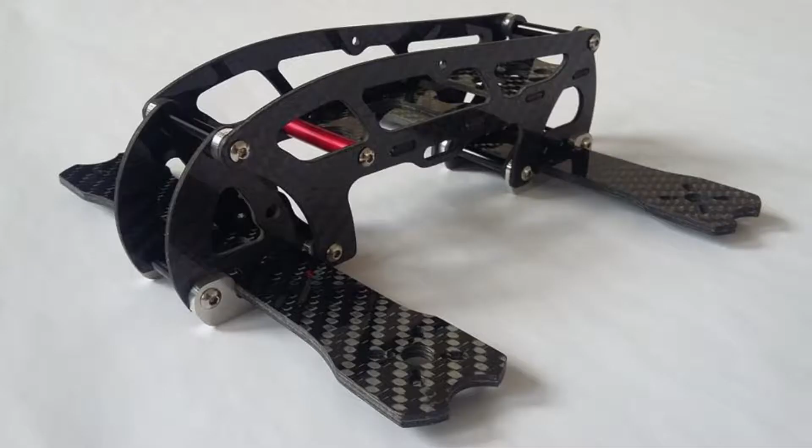Alright, let's kick off quickly with things that we didn't like, things that were frustrating. I went through a bunch of emails, WhatsApps, and guys phoned me, and all the comments and stuff, went through those as well. Before we go through this, a big thank you - there was a bunch of feedback, and you can see a good number of pilots spent a lot of time and effort to make the feedback as good as possible. There was very specific feedback, which is extremely helpful for us to make the best possible frame we can. So guys, a big thank you for all that feedback.

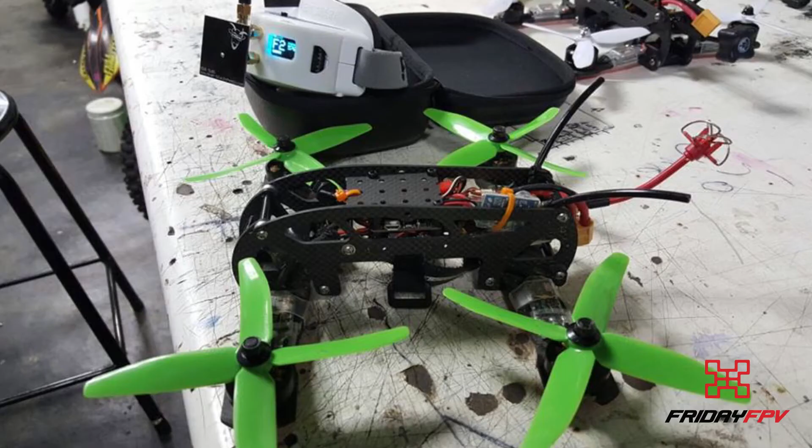Alright, so what didn't we like? I asked the question, what on the frame kit broke? And without a doubt, it was side plates and arms. That we're going to have to address - we're going to have to make these frames tough enough to carry the more powerful powertrains that a lot of us are now flying. So that's going to have to improve.

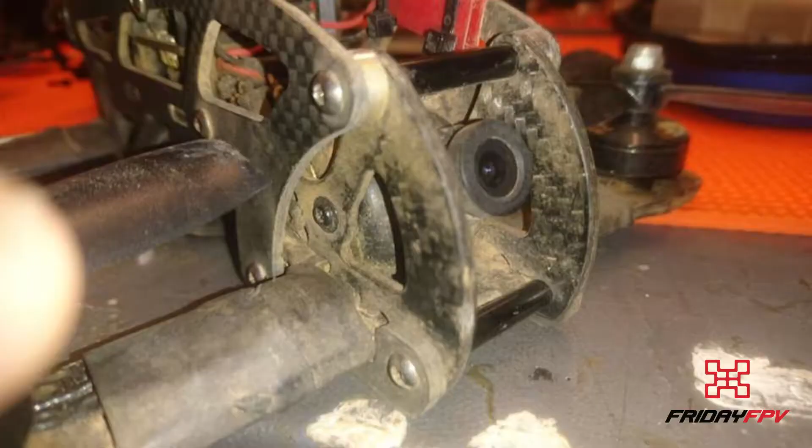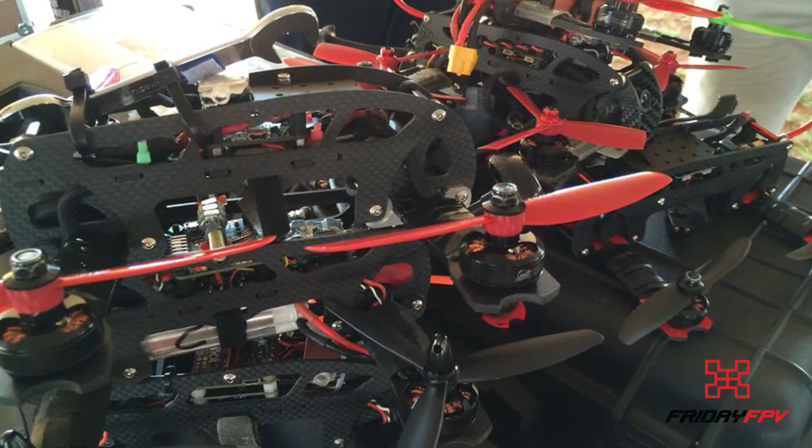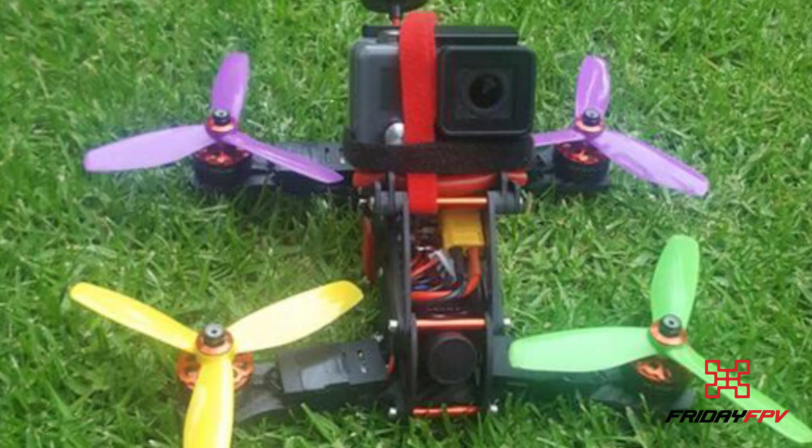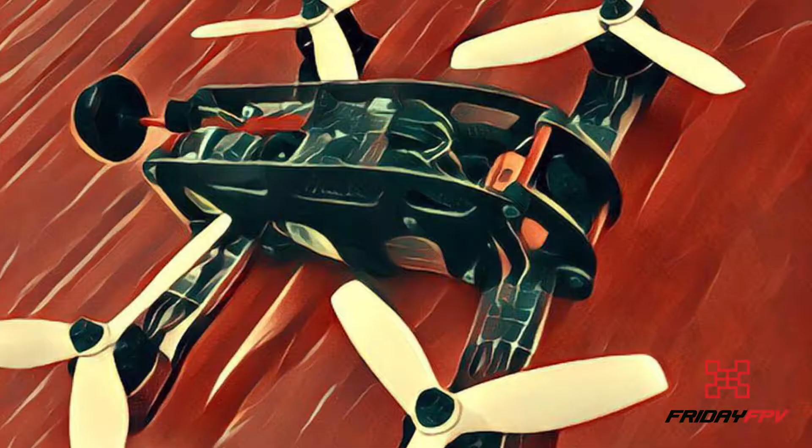Something else that came up a bunch - there wasn't a cut and dry yes or no to this, there was probably a good split. So if you do have any comments on batteries, please let us know. Some guys commented and said they would like the option to fit bigger batteries into their airframes. The frame was designed for a 1300 milliamp pack, and even today the vast majority of pilots still fly 1300 milliamp battery packs. So a good percentage of the guys we had feedback from were not concerned about the limitation on battery size at all. So like I said, if you have some comments on that, let us know.

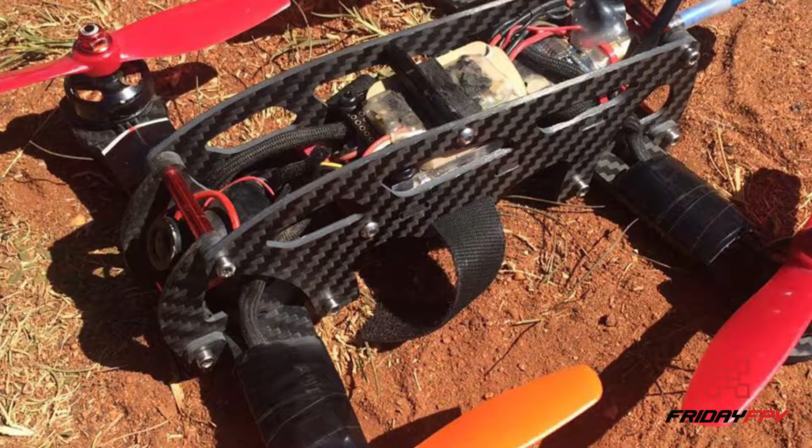The XT60 - guys liked the fact that you could protect your XT60 and protect your balance lead because it was housed internally. You wouldn't damage it in a crash, and you ran no risk of a prop strike. What guys didn't like was the fact that it was so fiddly and frustrating to connect and disconnect. So we're going to try to keep the protection aspect of it, but just make it simpler to plug into your pack.

Cameras was something that came up a bunch. I think this was one of the number one things that guys commented on. The camera angle was limited. I completely agree with that - we've got to increase that camera angle.

Also, the camera adjuster was buried in the frame, hidden by the side plate, so you couldn't easily adjust your camera angle. Guys want the option to be able to adjust the camera on the fly in the field, adjust it to where they want it, and lock it down in place. Also, the fact that the frame was only designed for one specific camera, the HS1177 - guys asked for the option to fit other brands and other format cameras for their frames. So we'll address that as well.

I think from my side, one thing that I felt was not so great was the complexity of the build and complexity of maintenance for the frame. It's definitely not the simplest frame, and especially for someone new to the hobby, it can be a complex build. So I want to make this frame as simple as possible. I think the fact that it did such a good job of protecting your electronics and your battery in particular made it a very attractive option to a lot of newcomers to the sport. Guys are concerned about wrecking equipment, and they may be nervous about flying, so the option of having a frame which protects your equipment is extremely appealing, but it was a complex build. So that is one of the things that is number one on my list to improve - make the frame as simple as possible so it's easy to build and easy to maintain.

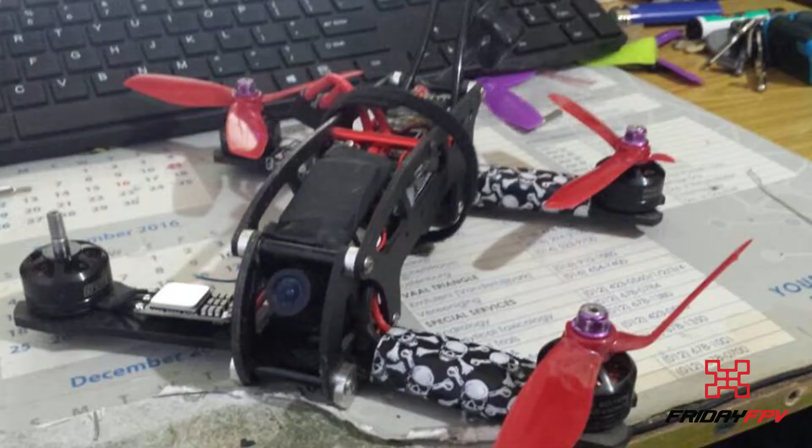Car analogies were actually used a couple of times, not just once. Justin made a nice analogy to the VW Golf. He said the current Golf 7, Golf 6, Golf 5, you can see it's a family. You can see from generation to generation what they've done, all the improvements they've made. He says don't lose that style, don't lose that theme, keep within the same Idein RS V1 theme.

I like that comment, I really did. And that did come up a couple of times with a couple of different car and motorbike analogies. So we're going to keep that theme. Now, this I was actually really glad came up so many times. Guys loved the fact that the frame was so tough and reliable that it protected your equipment.

As an offshoot to that, because you're not so worried about wrecking your equipment, it gives you the confidence to try new tricks, try new lines, and go find adventures, go explore. As a result of that, you end up having more fun and enjoying the sport more, and I think that was the number one most important thing for us when we did the V1 frame.

We wanted this frame to be tough and we wanted it to be fun. So I'm really glad that comment came up so many times. This point as well was mentioned by every single pilot that gave us feedback. They love the fact that it protects your equipment, and in particular that the frame does such a good job of protecting your battery.

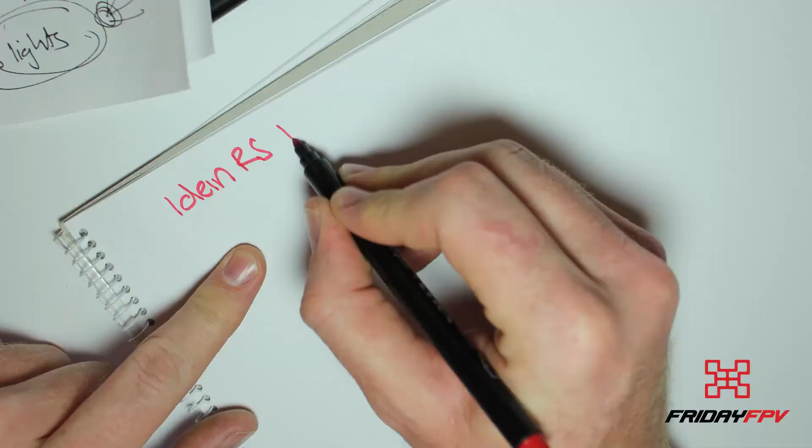So in summary, what are we going to do? We are going to make a frame that is as tough as nails and takes a damn good beating. We are going to make it protect our equipment and our batteries in particular as best we possibly can.

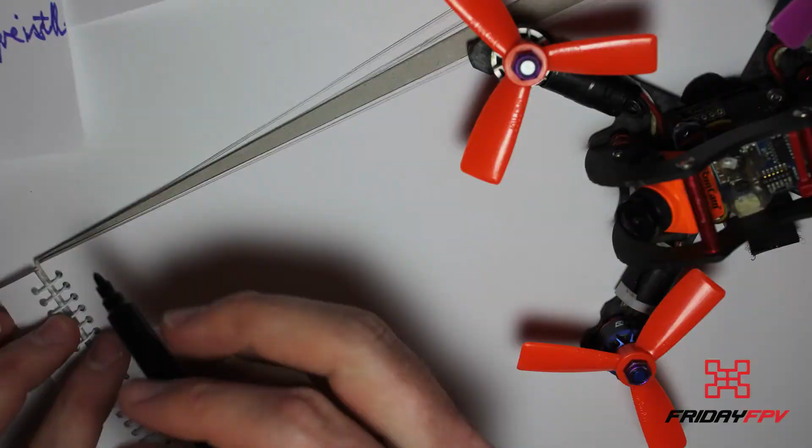We are going to offer some different HD camera mounts for the frame, and we're going to throw in some bling and some different color options there as well. I'm really excited about incorporating the aluminium into that. That's going to be really cool.

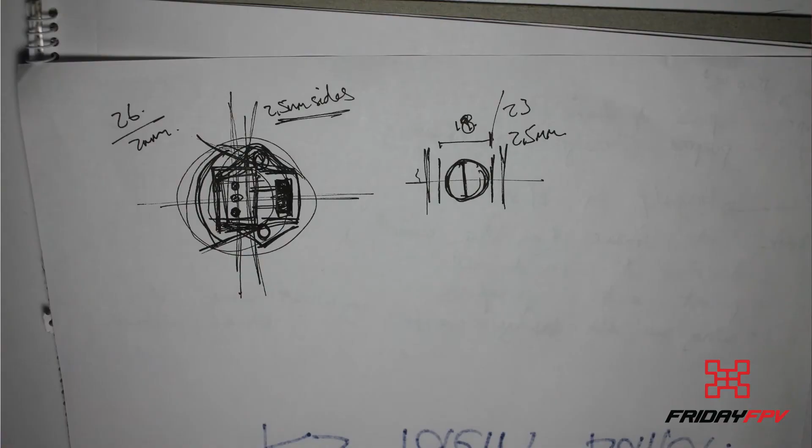I think most importantly, we are going to make the frame as simple and reliable as possible, but we are going to make it heaps and heaps and heaps of fun to fly. That is my number one most important thing we've got to achieve for this frame.